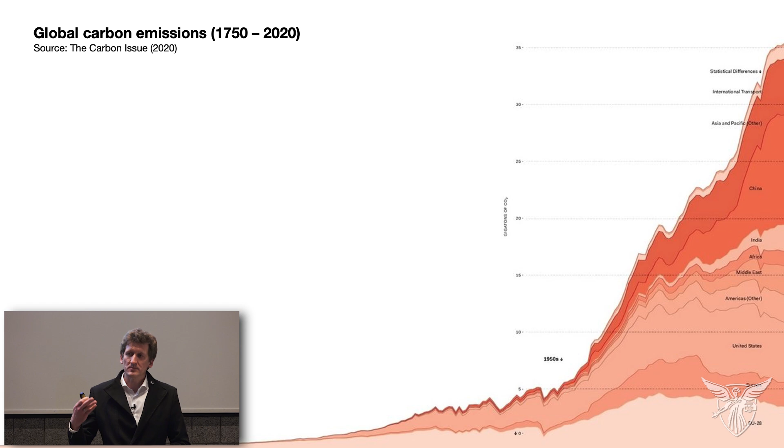And if you zoom a little bit more into some of these, this is the chart of global carbon emissions over the last couple hundred years. And you notice this exponential growth that started with the industrialization and then continued development. But the reason why I'm showing it is because to stay within, for example, the Paris agreement goals, we would need to mirror this chart and drastically reduce emissions very, very quickly to reduce global warming.

Essentially, these are estimates by Architecture 2030, and we're talking by 2030 we need a 65% reduction in emissions, which we all know in our industry, 5 years is basically tomorrow. That's the design phase and construction phase of one building. And so we need to act really, really quickly.

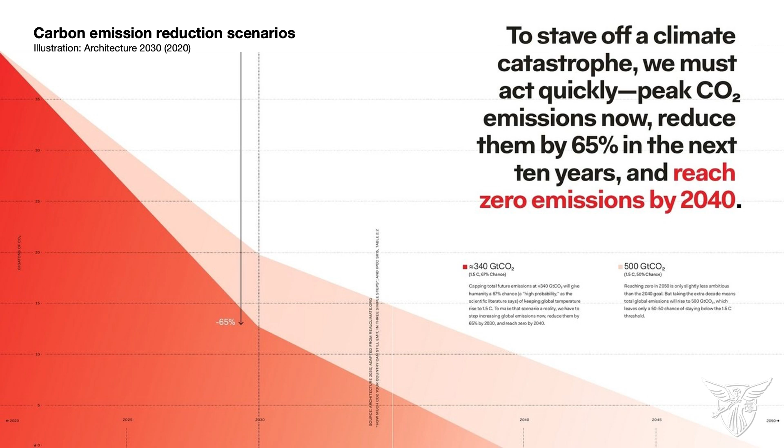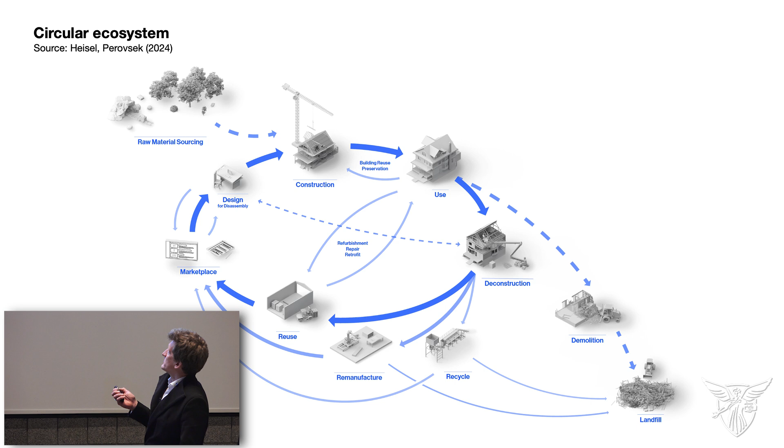And so what the lab is essentially trying to do is close that loop. And by closing that loop, we reduce the emissions that come from raw material sourcing, and not just the emissions, but also the social impacts, the environmental impacts, the labor impacts that are associated with global material sourcing. And at the same time, on this end, we're reducing the amount of waste that's going to landfill by closing that loop.

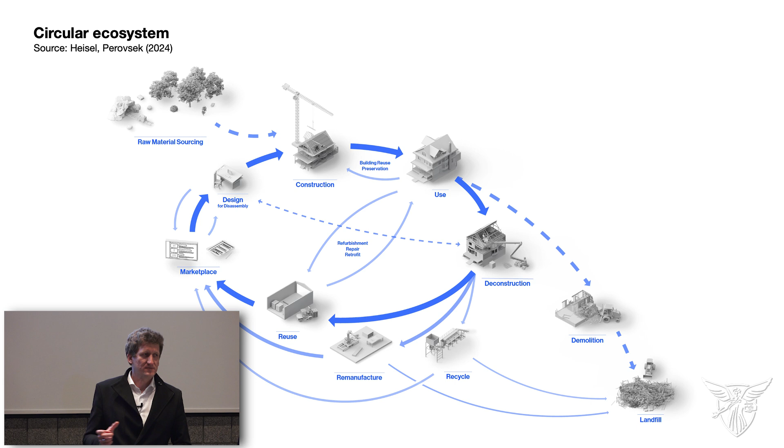And the important thing is that there are several different strategies within a circular economy that we can look at. There's, of course, recycling that we've all talked about for years. And then there's remanufacturing and reuse and several others. By now, I think we are at 7 Rs in some of the publications. But what I'm trying to show here is that the most impactful of these cycles is the smallest and the most local, and that is direct reuse.

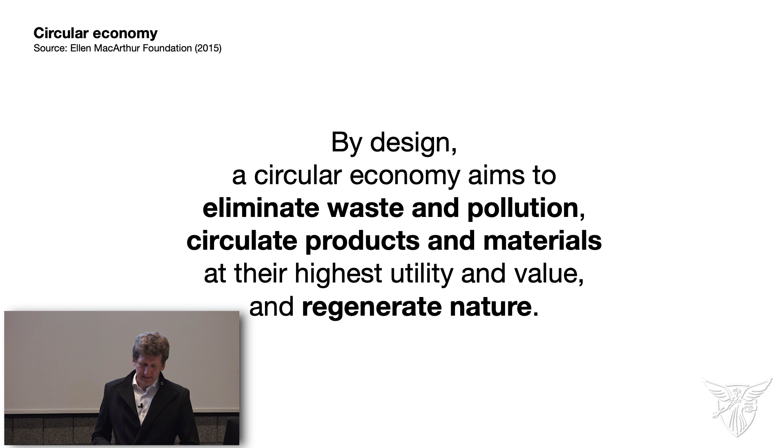And just so that we all have the same definition in mind, if you try to define a circular economy, then it is by design a system that eliminates waste and pollution, circulates products and materials, and regenerates nature. And I'll try and cover all 3 of these main points tonight. So this all sounds fantastic. The problem is the reality looks more like this.

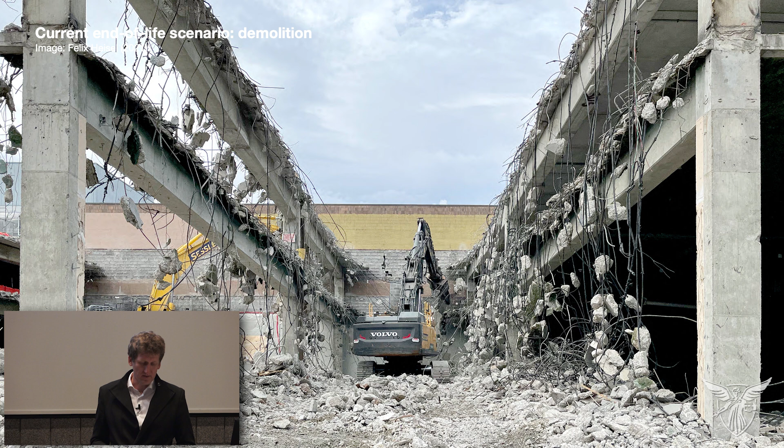So if we look at the end of life of a building, we are demolishing. This is an example from Ithaca, New York, where the construction manager was actually incredibly proud of what they've done. Right? They pulled out all the steel, they ground down all the concrete, they reduced landfill. But then when you start digging into these material streams, the steel was exported to China for recycling. So just the distance and the emissions associated with that travel probably offset any of the good parts that the recycling will do.

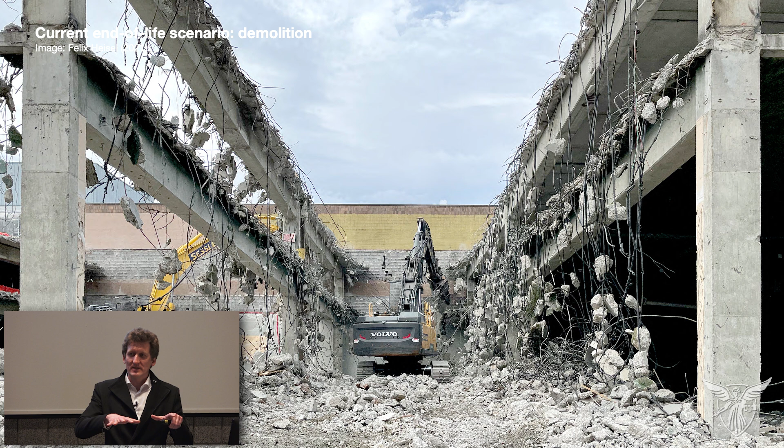And on the other side, the concrete aggregate was used as clean fill on the local landfill. So this is just renaming what is actually happening, right? We need to weigh down our landfills, and instead of using virgin rocks, we use concrete, but essentially we're putting the concrete on the landfill and calling it circular economy. And that explains a little bit the struggles that we're facing in this industry, right?

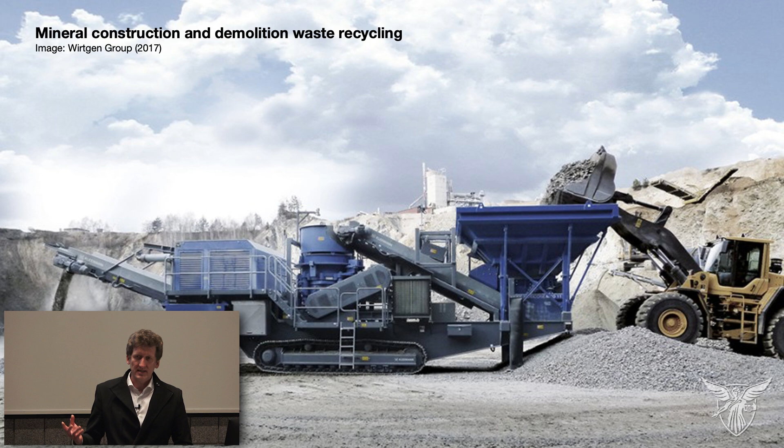So if you go through the material cycles quickly, we can of course recycle mineral demolition waste. We use it for roads, for aggregates. The problem with that is that the cement is actually the real problem and the aggregate isn't. And so we're not really tackling any of the environmental impacts of concrete, but we're of course at least reducing the waste. But then there are other families like glass that are technically 100% recyclable, and we're just doing a really bad job in getting the material out of the built environment in a way that is reusable or recyclable.

Just for information, if you wanted to use recycled glass cullet to produce float glass, the technical limit is 1 gram of dust in a ton of material. That's the level of cleanness that you need to make float glass, right? If you look at our demolition sites, there's a little bit more than 1 gram of dust involved per ton of material. And so it's not about the technicalities, it is about the way we operate these sites.

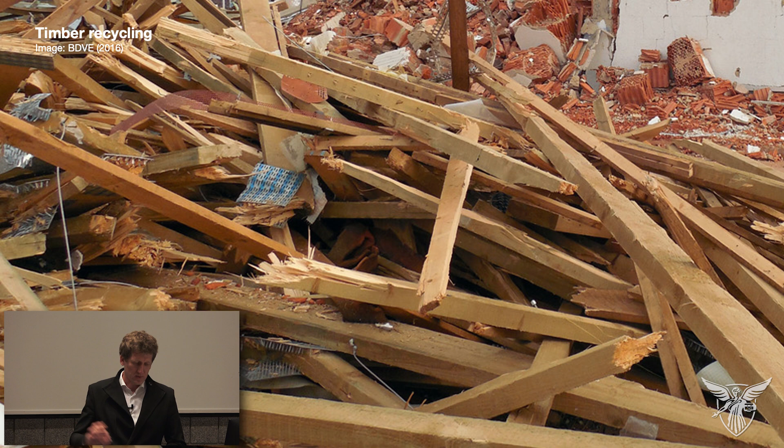And a similar example, you can look at timber, right? Timber theoretically can be reused very well, and I'll show some examples, but the way we break down our materials in the process, we're reducing the material value to 0 because we're breaking those pieces into small particles. And so that brings me to the first project that I wanted to show you. In the lab, we just simply said, okay, what would be an alternative?

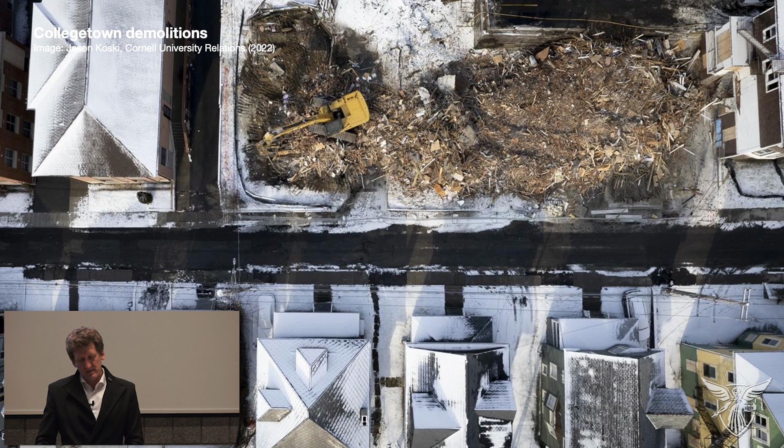An alternative to demolition is deconstruction. Deconstruction is not an alternative to building reuse or adaptive reuse or building preservation. I just want to make that really clear. We're not promoting the disappearing of buildings. We're simply saying if a building reaches the end of life and there's no alternative than clearing the site, then deconstruction is your sustainable alternative to demolition.

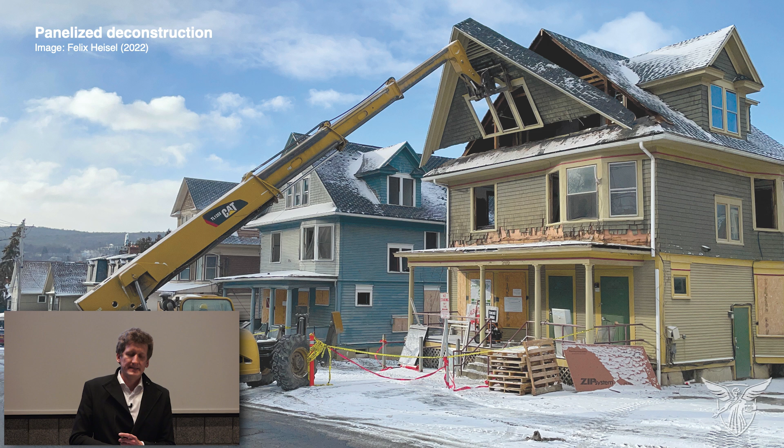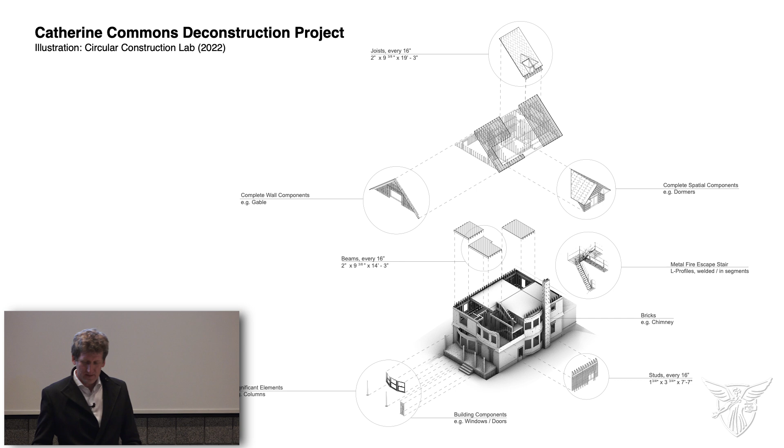And so one of the questions that we wanted to answer is how can we overcome the stigma that deconstruction is more expensive and more labor intensive than demolition and thus cannot happen at scale. And so this is a project in Ithaca where we convinced the developer of a large 300-bedroom housing unit to deconstruct one of the houses that he needed to clear in this site. So you can see he demolished 10 buildings while we got one to deconstruct as a case study. But the deal was we need to be as quick as his demo crew, because if they catch up on us, they will just demolish it.

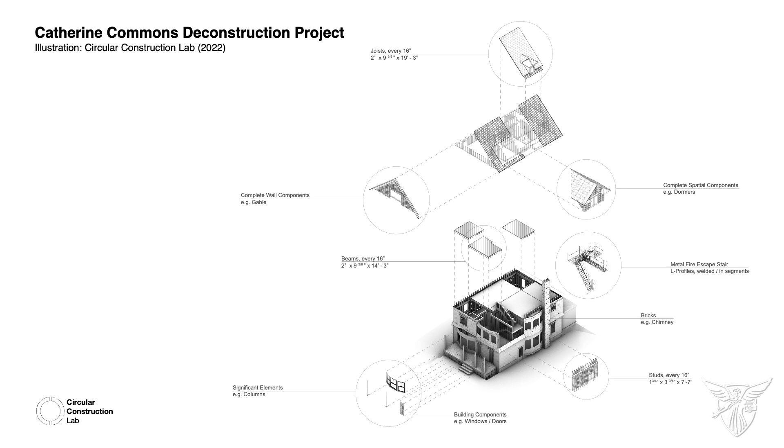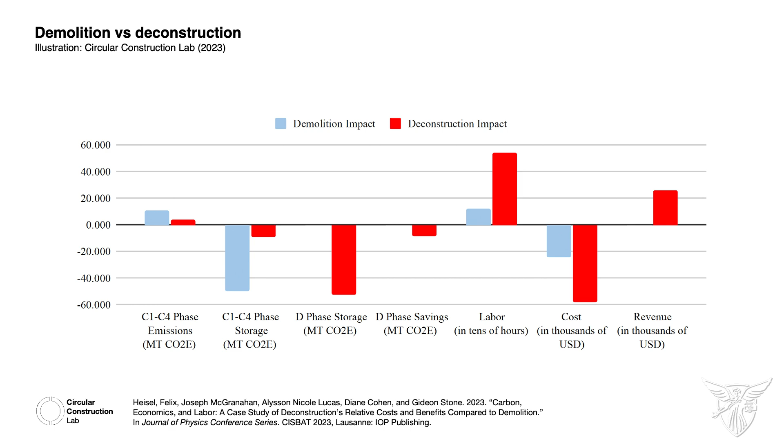And then we went at it and analyzed the data and worked on publications, and worked through the material and started reselling that material. And in the end, it turned out that the difference in cost that we had in the operation of the site, we were able to offset that with the revenue that came from the resale of the materials. And so now you're cost competitive and you're time competitive, right? And that's the good news, because now we can talk about the things we really want to talk about with deconstruction. It's the social values, it's the reduced air pollution, it's the workforce development that happens, it's the local job generation that happens.

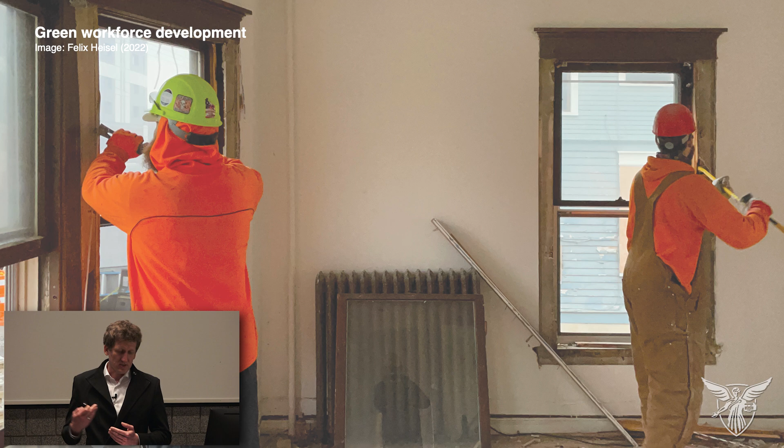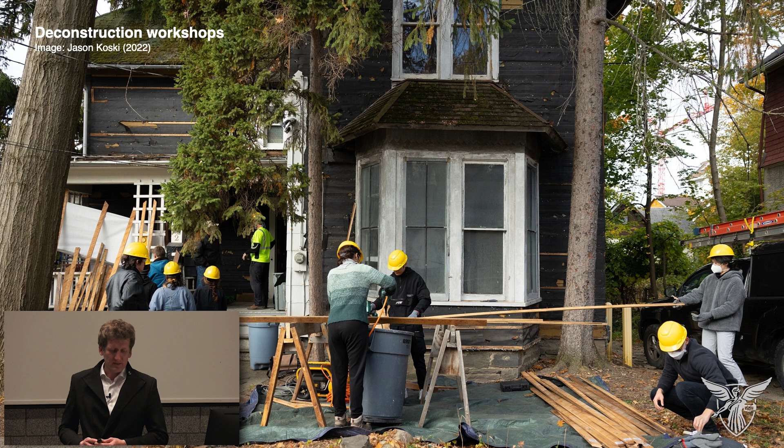So these are images from the deconstruction site where we trained local carpenters in the strategies of deconstruction. We, in this project, only employed union labor, so this is the local union apprenticeship program that was training on this deconstruction project. And then we started doing deconstruction workshops for students on different projects, learning from these experiences.

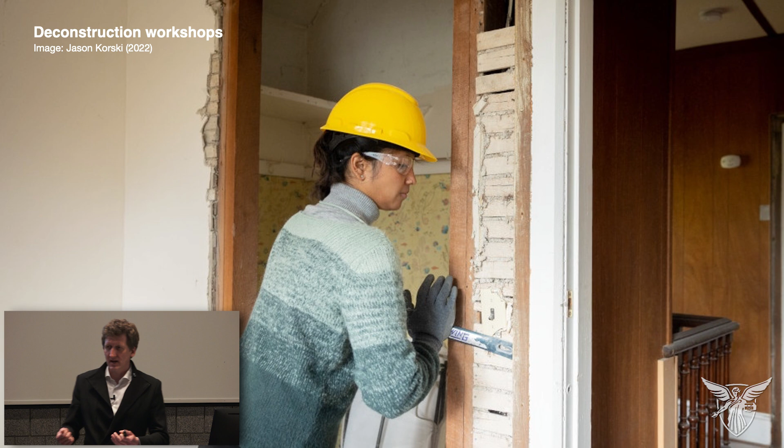And this is, of course, a fun experience, but there's also a pedagogic value in this, because if you've struggled for a couple hours to try and get a piece out of a building, and that piece wasn't meant to be taken out, right? It was glued in there, lots of spray foam, and I don't know what you want to do, right? And then you go back to the drawing table, you draw a different detail, right? You don't draw spray foam, right? Because you've just struggled with it.

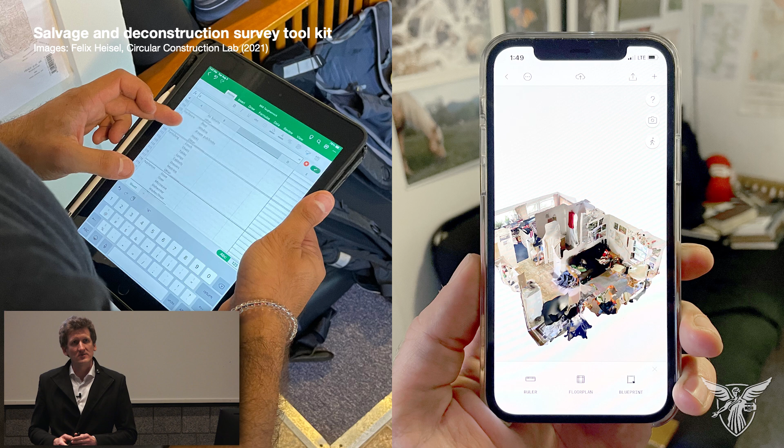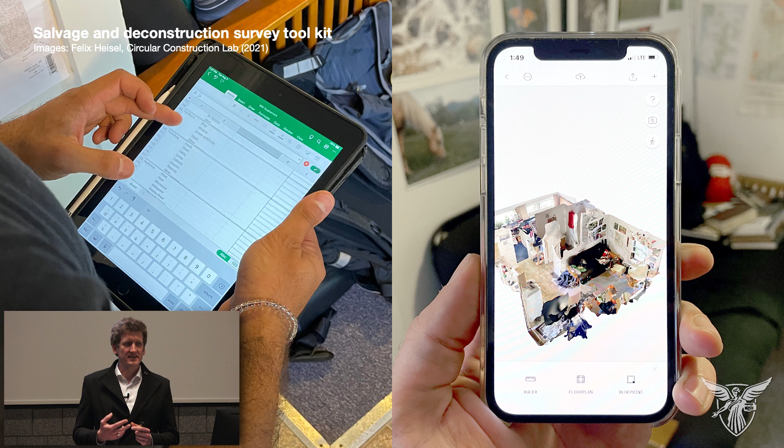There's a couple other things that this building taught us, and those have to do with what are the limits to scaling deconstruction. And so one aspect is that we tend to not know what we're going to find in a building. Documentation is missing. If we have any documentation, it's a nice hand drawing in the archives of the city, where you essentially have a thick black line that represents this is the wall section, right? But you would never know what are the layers, what are the actual materials in this building.

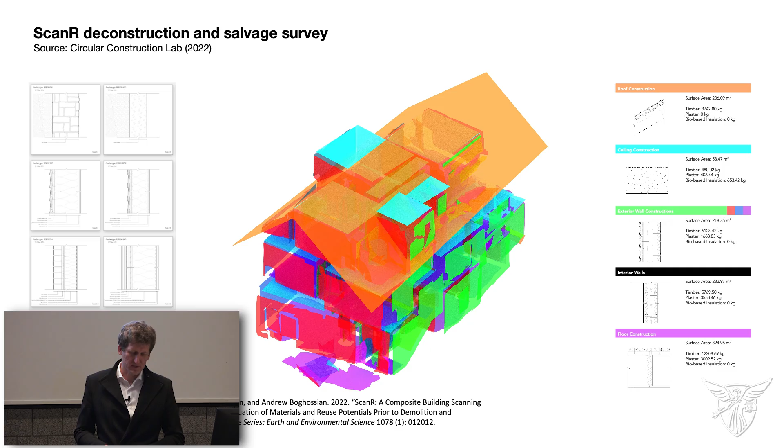And so we started to think about what can we do with technical means to make this process a bit easier, and developed an app which we call ScanR, which essentially combines a tool that now most of our contractors have in their pockets.

Tablets or iPhones all are LiDAR scanners by now, and so can we use these really low resolution LiDAR scanners that are available to almost anyone now, in combination with a database of construction archetypes, to very quickly estimate what is the content of a building, what are the tonnages that we're expecting to come out of a building, what is the embodied carbon values that are associated with these materials.

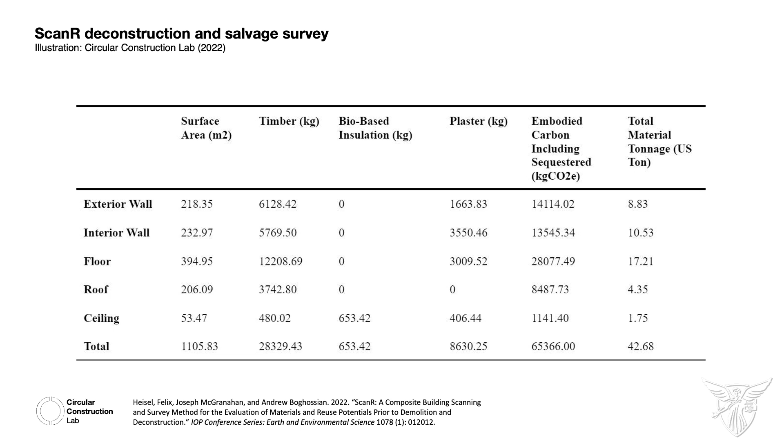And we're not saying that this is bulletproof and this data is all correct. What we're saying is it gives a contractor really quickly more information for an informed conversation about deconstruction or demolition. Right? So it's just a way into a conversation that we want to have and that we tend to not have because of the limited data availability. And so you can have a conversation with your building owner or your architect or your deconstructor or your permitting officer about the benefits of deconstruction.

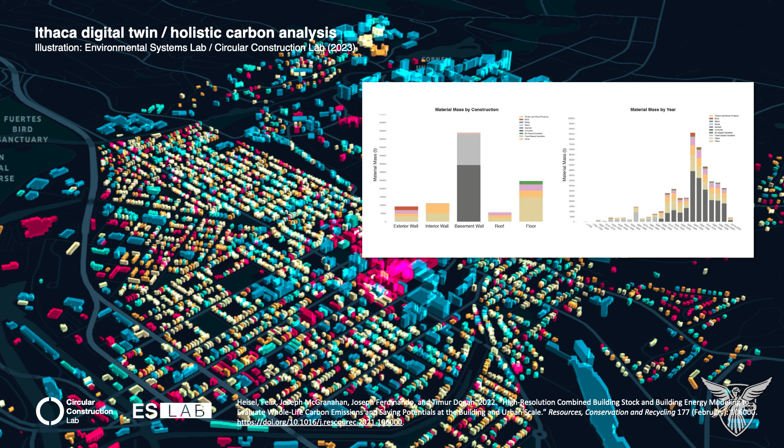Now, the interesting thing is, once you can do that on a building level, you might think about the city level, the urban level. And so we started a project together with the Environmental Systems Lab at Cornell University to build a digital twin of Ithaca. Ithaca is an interesting case study because it has one of the most progressive environmental laws in the nation. The agenda is to decarbonize all 6,000 structures in Ithaca by 2030. That is also tomorrow, and I'm not sure if we're going to get there. But it is an incredibly ambitious goal that drives a lot of research and movement.

And so we're helping the city, and the city is helping us to figure out what are the right questions to ask, what are scenarios that are important to model. And so we're using similar techniques to understand what is the material content of a city, what is the makeup of these structures, what are possibilities in terms of the use or the continued reuse of these buildings, and what are scenarios when you start upgrading in terms of the materials that you take out and the materials you have to put back in, right, in the renovation process, and how could we close the loop on those.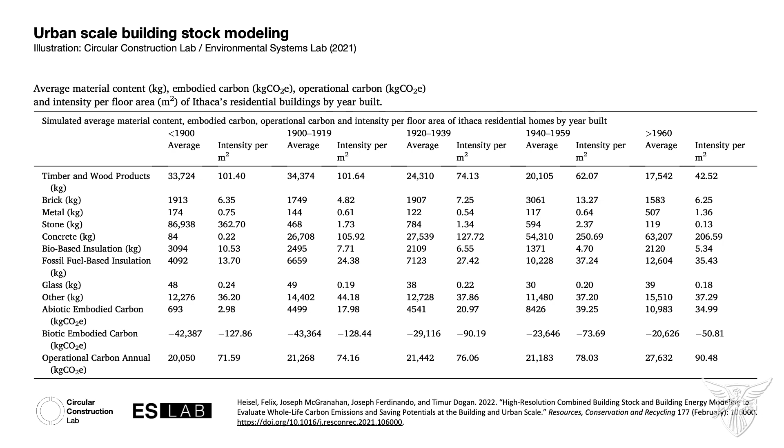And then the last question that we can answer at this level is, it's not just about how much timber is in a building or how much concrete is in a city, but which part of that is accessible, which part actually has value, and so we can start calculating circularity indicators for buildings, for material groups, or for components on the city scale.

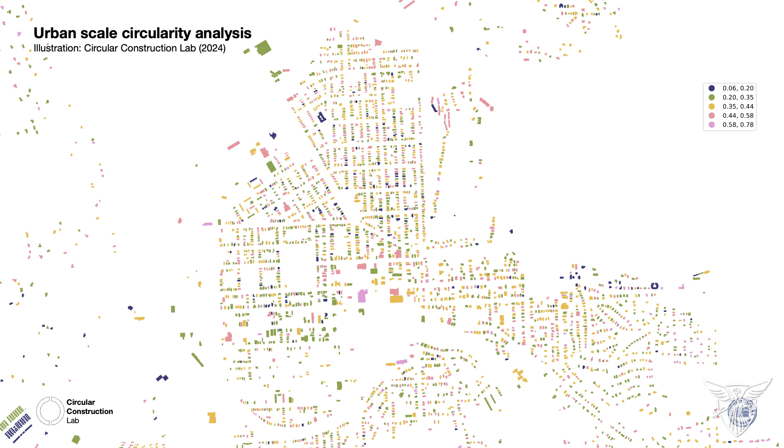Now, as I mentioned earlier, none of this is possible to do alone, and it's become more and more obvious that we need policy and code to follow suit, or to support us, or to create a framework that we can operate in. And so we founded in 2020 an advocacy group that we called CROWD. CROWD is an acronym that stands for Circularity, Reuse, and Zero Waste Development.

It's a group that came together out of the concerns about demolition in Ithaca, but then very quickly grew to a statewide organization that now has several cities and municipalities in it, but also for example, the New York State Preservation Association, a lot of research labs, reuse centers, industry, NGOs. And so we started meeting during COVID every Monday morning at 9, and we're still now meeting every Monday morning at 9. And that is an incredible tool to move agendas or understand where we should act, because all of these different agencies have their feelers in the conversation and can report back.

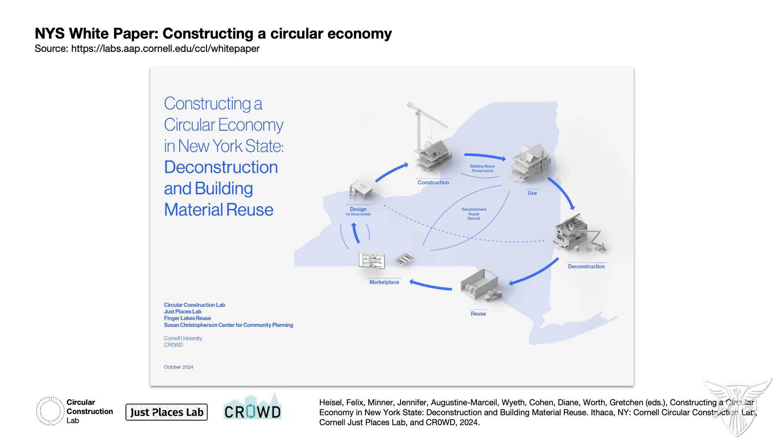And so as a group, we, a couple of years ago, realized we need to put out a white paper that estimates the potential of this on a state level to convince people that we need to change policy and legislation. And so we just published a white paper. It's titled Constructing a Circular Economy in New York State. It's freely available. And the goal really was to, first of all, understand the status quo. Where are we? What is the data? How much waste are we generating, et cetera.

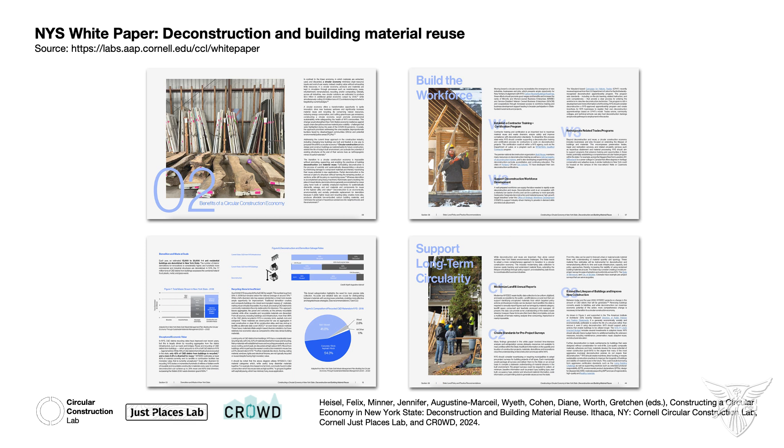And then going from there, do economic analysis of what is the potential, and our estimates are that if we were to shift about 75% of residential demolitions to deconstruction statewide, there's a $3 billion economic impact of that, and about 13,000 jobs that could be created. And so suddenly we're realizing, hey, that there's something there that actually might make people aware of a possible shift.

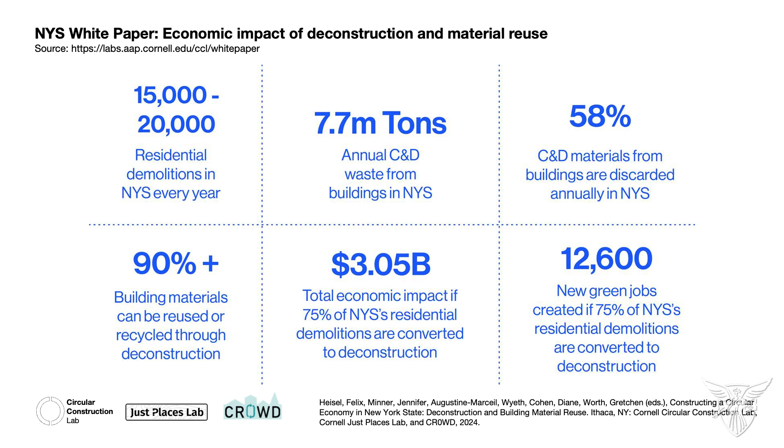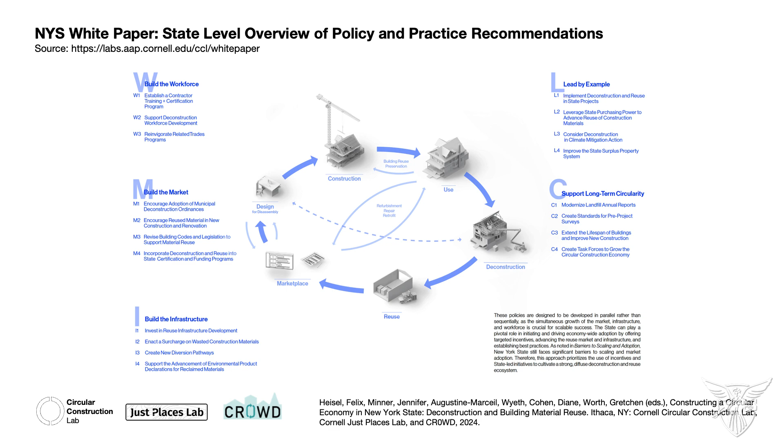And then we followed up with 19 policy recommendations on how this shift would be possible. And these policy recommendations essentially follow all the life cycle moments of a building. So how do we build a workforce that does that? How can we build a market for those materials, right? Because if you just take a lot of materials out of a building and they don't have anywhere to go, then that doesn't scale either. How do we build the infrastructure, right, to do all of that?

How can the state lead by example? It's interesting, in New York State, for example, the university system owns about 40% of real estate statewide. So if they change, right, there's an enormous budget, an enormous capacity of buildings to lead by example. And then questions of how can we sustain that circularity moving forward.

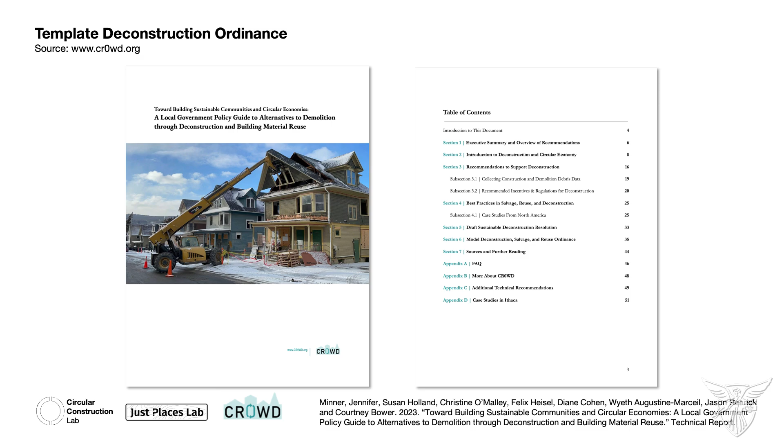Part of this is also the recommendation for a deconstruction ordinance. We developed a template deconstruction ordinance that now has been used already in 2 municipalities, Auburn and Dryden, throughout the last year, to be passed by the city and town councils unanimously in both cases, to shift really from demolition to deconstruction.

Now I mentioned I'm going to talk about the 3 parts, right? So now we've created a lot of material. The question is, what do we do with that, right? And so I wanted to show a couple projects. This is a project from our office in Germany. It's called the Mehrwert Pavillon. It's a pavilion that we built for the Ministry of Environment in Baden-Württemberg for the Federal Garden Show, which is a massive event that happens every 4 years in Germany.

And they asked us to build a pavilion only out of secondary resources. So all of the materials in this pavilion are either recycled or reused. There's no virgin materials. And so we decided to kind of split it by material families. The shell is made out of recycled glass. The structure is made out of directly reused steel. Then all the furniture is recycled plastics, in this case recycled household plastic waste. And then we have all the ground and the foundations out of reused or recycled mineral waste.

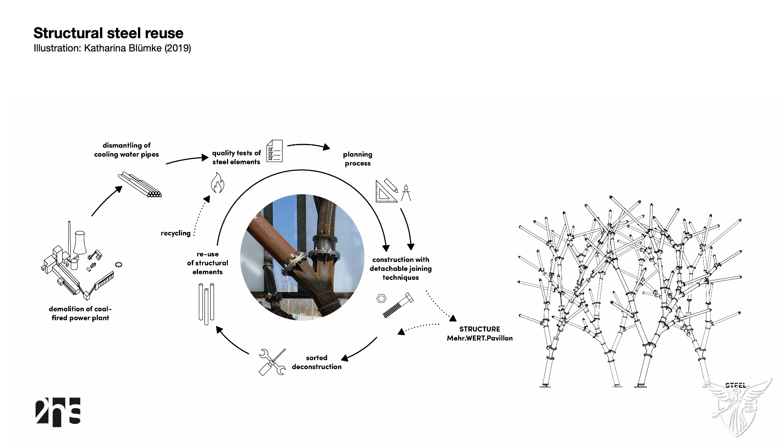And so we had an interesting source because all the steel that came out of this project comes from a former coal-fired power plant. Germany's shutting down its coal-fired power plants because of the shift to renewable energy sources. And now we have these structures standing in the landscape and no one knows what to do with it. It's massive infrastructure that is now obsolete.

Unfortunately, the standard answer is we're going to demolish this, and they did. But before they did, we were able to pull out enough steel to build a small pavilion. The problem was we had no idea what kind of steel that is, right? There was no documentation, and so without documentation, no building permit, right?

And so we ended up having to do 5 tests, most of it like chemical composition, weldability, tensile tests, compression tests, to specify the material qualities of the steel to in the end find out this is standard structural construction steel. And the moment we had that answer and we had it signed and on paper, we got a building permit to build with it, right?

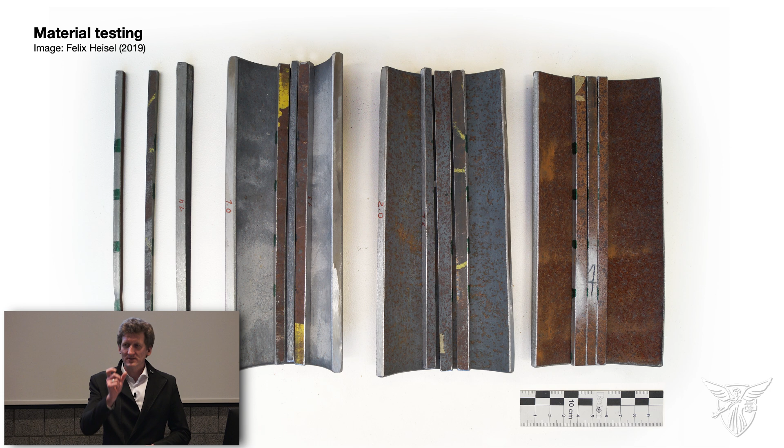So the point here being there is nothing in the code that specifies virgin or primary. There's no difference from a code perspective. The only thing you have to fulfill is you need to create enough information to specify that you're fulfilling the criteria that the code specifies, right?

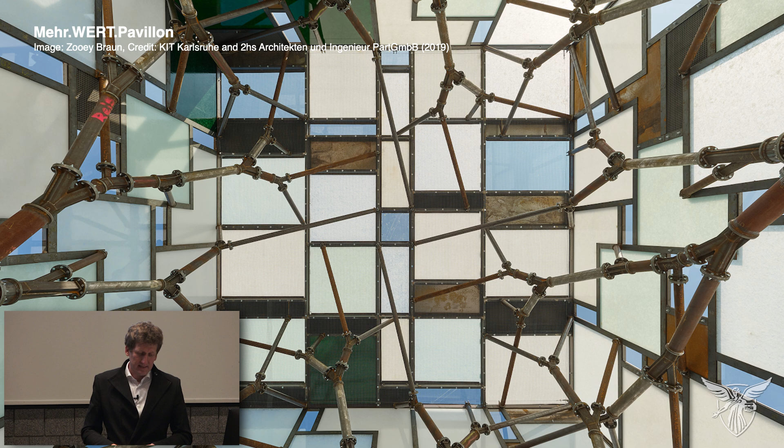And so in this case, we then were able to build this structure out of these tubes that held this pavilion. A side note is that, of course, this pavilion would have never looked the way it does without a very specific material stock to work from, right? And so the design process with reclaimed materials is a very different one from a normal traditional design process where we first come up with a form and then we open the catalog and we pick the materials that will fulfill that form, right? In this case, it's the flip side.

You first have a material and you need to figure out how do you design with that, what kind of forms could you build with it. And it's a really interesting exercise and one that I hope will become the norm moving forward.

Similar project, but in a very different context. This is a small pavilion that we did at Cornell University. Here we reused part of the materials that we salvaged from the deconstruction project I just showed you a couple minutes ago. And this is a little pavilion for an arts biennial at Cornell University. It looks very small, but it is large enough to require a full building permit by the city of Ithaca.

And that actually turned out, in the end, as much work as it was, as something really positive, because it required us to think through the process of what does it take to get a building permit for structural reuse of salvaged timber, which is by code not allowed in New York State. And so working through that essentially opened up 3 new research projects that we're still working on moving forward.

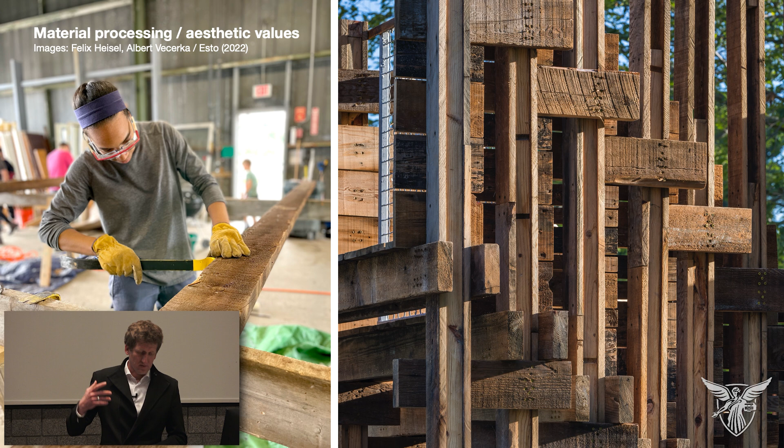It, of course, started with the process of how do we use these materials, how do we process these materials. We took out all the nails, there's lots of hand labor in this, questions of the aesthetic of cutting through it, the old patina, the new cut. There's a lot of aesthetic questions that we thought about in how to use this material.

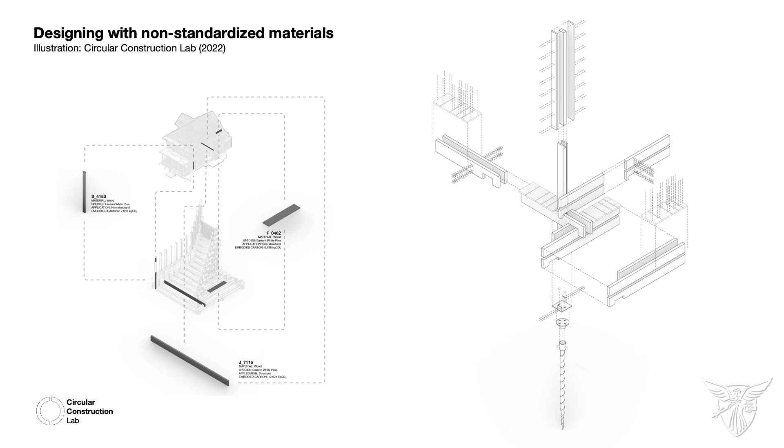Then again, there's a data-driven question that arose from it, kind of where did the material come from, and where is it now, and where is it going next, and how do we create a material passport for these materials, and how do we connect the digital and the physical, which is a really difficult question, as it turns out, to continuously link a digital twin to its physical representation when you start messing with the physical, right? And the items go different places.

Or how do you design with a stock that is not uniform? Material tolerances, for example, were up to about 1/2 inch. And so if you design a detail that depends on the fact that you need this tolerance to be near 0, none of this fits together in the end. And so how do we change our detailing so that it adjusts to this new type of stock that we're creating through deconstruction?

At the end of the life of the structure, we had to take it down. Of course, it was on university grounds. The space was needed for something else. But we were invited to rebuild it as part of the permanent collection of Art Omi, which is a sculpture and architecture park near Albany.

And of course, the site was different, and so our answer needed to be different. And so we were able to reconfigure the structure because it was designed for disassembly. All the details were possible to be readjusted. And so this is how it now looks currently in this sculpture park.

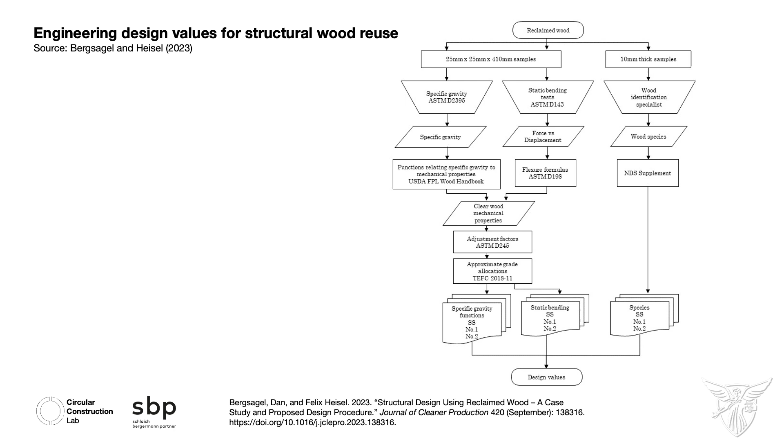I mentioned that there's research that came out of this. So the first question that we tried to answer: what are the correct engineering design values when you work with structural wood? It turns out that the standard process would be you go into your book of specifications, you look up the design values based on your species, and then you use those design values to calculate the dimensions that are required for the specific load. Right? The problem is we don't know what the species is, right?

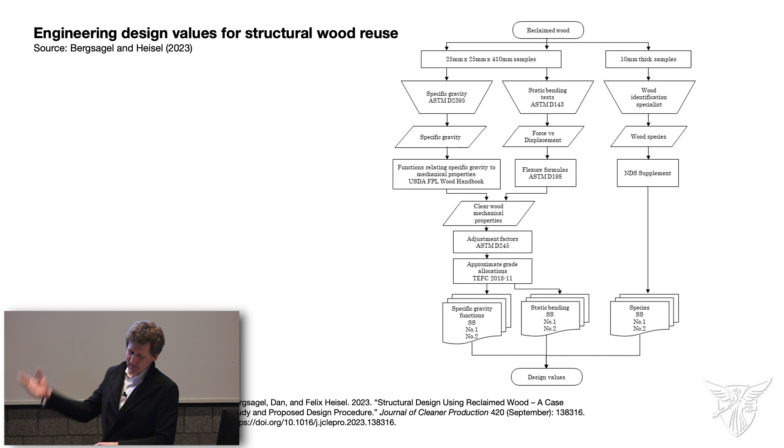And we sent out samples to 3 national experts, and we got 3 different results. Right? And so that sort of said, okay, this doesn't scale. How can we move forward with that? And so here's 3 different other paths of how this could work. We could, of course, do structural testing, but then we lose a certain amount because that's destructive testing in most cases. We can go by the specific gravity, or basically the density of the material.

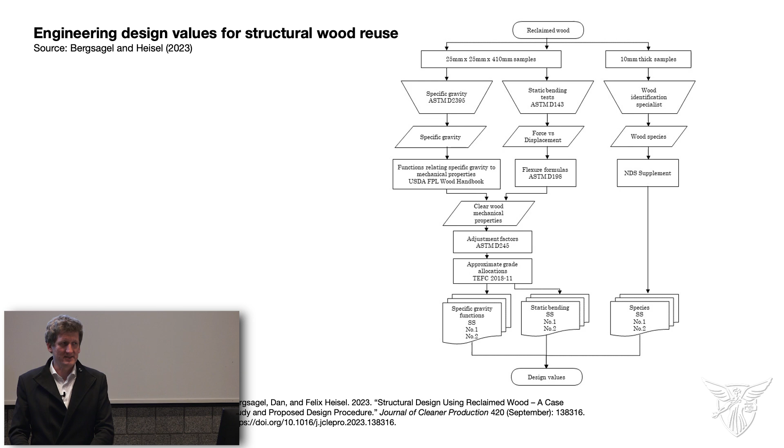We can do a sort of midway with some testing and some assessment. But it turns out actually all of it revolves around the density. So the quality of the material actually makes the biggest impact, and that's good news. The density is something that everyone can easily test. All you need is a scale and a tape measure. So that's interesting. But out of that conversation, again, came the question: how can we implement something at a larger scale, maybe?

And we learned that there's two states that have legislation that allows timber reuse. Not surprisingly, that's Washington and Oregon, because they have phenomenal old growth timber in their built environment. And if you deconstruct a house in Portland, Oregon, you get a value out of it that's probably much higher than anything you could buy right now in Lowe's or Home Depot, right?

And so they always understood the value of these timber elements, and now basically allow the direct reuse of these elements through code, because it auto-assigns a grade 2 to any timber that comes out of a deconstruction project. Which is a structural grade, and you can do stick frame construction with that. And so you can start building residential houses without having to reapply or regrade the timber.

This bill is doing something similar. It's learning from the precedent in these two states, and is in both the Senate and the House right now for discussion in New York State. But there's something maybe that machines can do for us in terms of visual grading. And so another project that one of my PhD students is working on right now is the question: can we use AI to do visual grading of lumber?

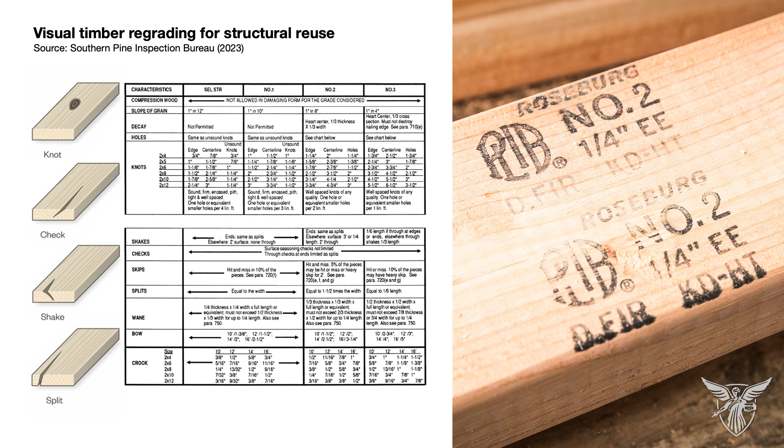Because in the end, it's a very technical and very prescribed process. You're counting knots, the size of the knots, the distance of the knots, the length of a crack or a check or a split. And if we find a way for the machine to understand and detect these defects, we could use the machine to do the grading for us, and it actually works phenomenally well. So we have a process now in place that does the visual grading and detects these things.

And the next step is to now integrate this into the inline process of Urban Machine. Urban Machine is one of our industry partners that developed a robot to denail lumber. So the robot pulls out the nails. And what we're hoping for is that essentially now at the end of this process, you don't just have denailed lumber, but you have denailed graded lumber.

Because at the end, as the last step, the machine puts the stamp on it because we know what quality it is. And the interesting thing, going back to the conversation about steel: that bypasses any new requirements for building codes, because the moment it has a grade, it goes directly into the market and can be used like any other timber.

And the last step in this is, what can we do with all the smaller pieces, right? Because what I just showed you assumes that we're pulling out nice joists, 2x10s, and beautiful material. That's not always the case, right? Sometimes you end up with a small piece and you don't really know what to do with it. And the answer to that, of course, is engineered timber products. That's essentially what the industry does already.

The problem with those, from a circular construction perspective, is the adhesive, right? It's full of adhesive, potentially VOCs, undetermined end-of-life strategies. And so what we're trying right now is something we call GrooveLam, which is essentially using a mechanical interface between the layers and fasteners. In this example, it's plastic straps. They turned out not to be the best solution, but they're the most visual on what it does. It just holds together these two pieces, right?

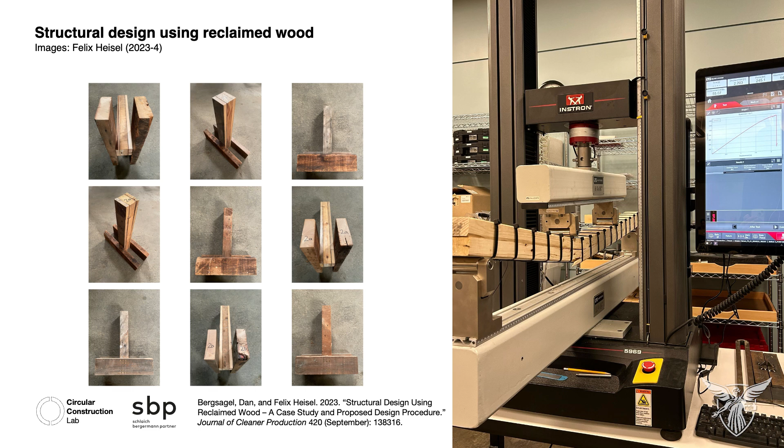But we're creating some really interesting large-scale beams that are engineered timber products from shorter length and shorter dimensions, but that can span large dimensions. And we just won a grant, NYSERDA grant, with a really phenomenal collection of industry partners to scale this process, and we're working on the design for 2 case study projects, one in Brooklyn and one in upstate New York, to really reuse deconstructed lumber for larger spans.

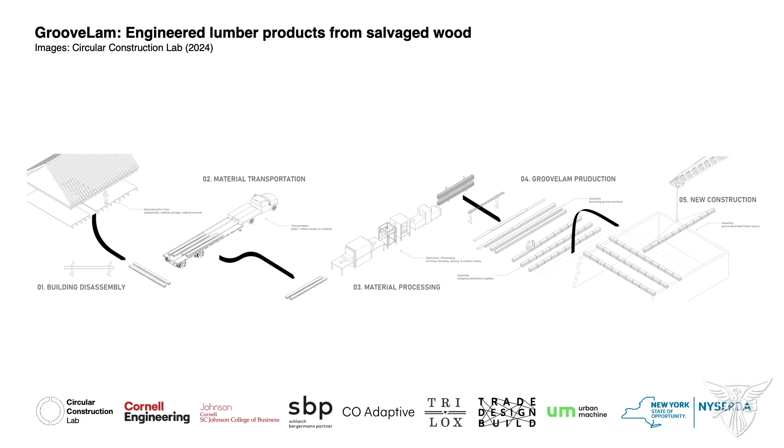And then there's the third question, right? If we're not just using salvaged materials, that's one part, but the question is, how do we design differently so that buildings in the future can be disassembled easier, right? So that we don't have to deal with all the problems that I just explained.

And so there's one case study that we built with the office again in Switzerland in a collaboration with the office of Werner Sobek. And it's called the Urban Mining and Recycling Unit. It's essentially this piece. The larger structure is called the Nest. It's a really interesting research infrastructure that EMPA, that's the former material testing agency of the Swiss government, built. It's now part of ETH Zurich and became sort of a material research testing laboratory. And they built this structure that allows for one-to-one, full-scale modules to be pushed in to test different ideas.

And so they came to us and said, well, you published this book, Building from Waste, and does that actually work? And could you prove it? And can you build a building that is designed for disassembly? And so the brief was very clear. Any material that goes into this house has to be able to come out and go back into their original material cycles. No waste. It's a very academic brief for a full-scale actual construction. And so we tried to push it as hard as possible, and we had the phenomenal position that our client supported this research and had the money to fund some of these more extreme solutions.

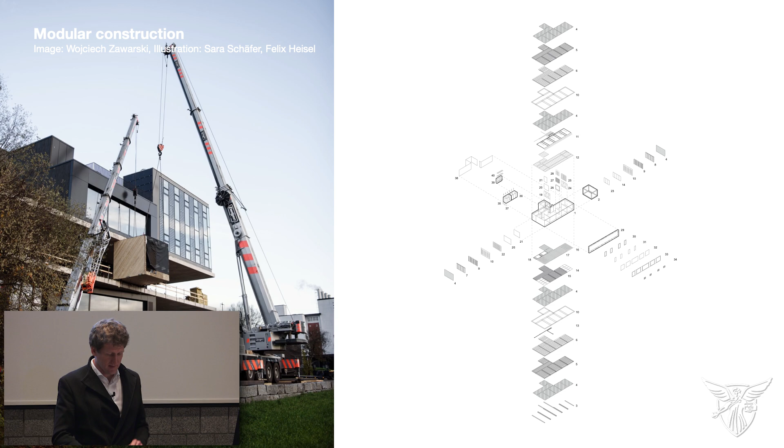But the benefit of the assembly plan of the module is that it is also the disassembly plan. Right? So you already know which materials are where, how are they connected, and so that involved this kind of design for disassembly idea. And then we were wondering to answer certain questions. For example, can we build brick walls without mortar, right? And so there's an answer to this.

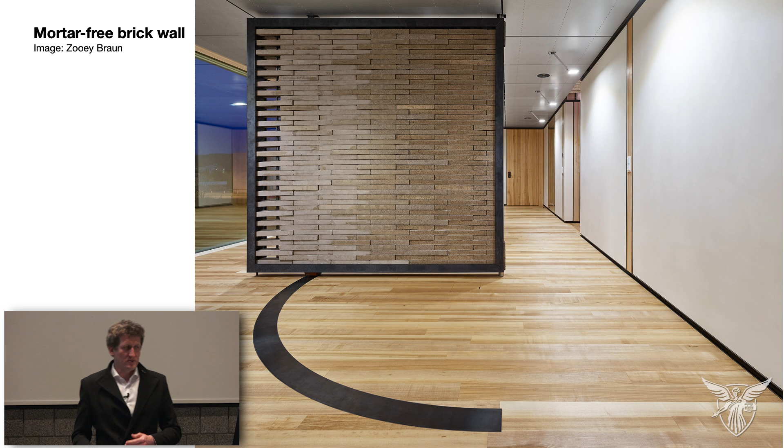This uses bricks that are made out of construction waste. It's a company called StoneCycling from the Netherlands that is selling bricks that are called wasabi or aubergine or salami based on which particles of demolition waste they're putting in. So the bricks are sort of the salami pieces, and it's a beautiful product. But we worked with them to develop a unique brick that has a tongue and groove system and holes for post-tensioning bars. And so there's a structural wall that is made entirely from a mortar-free brick construction.

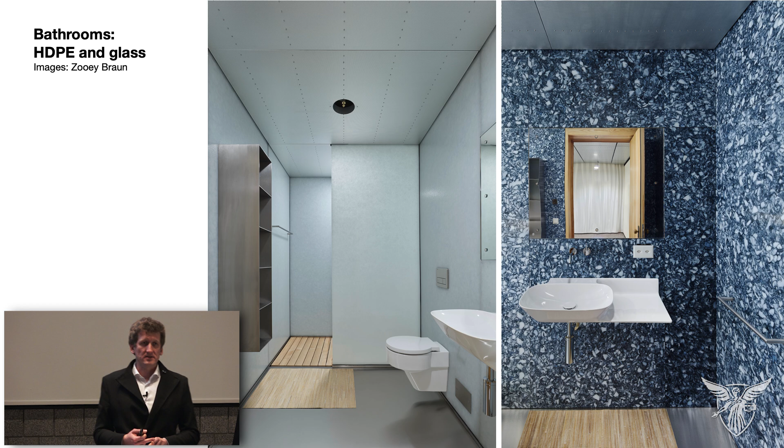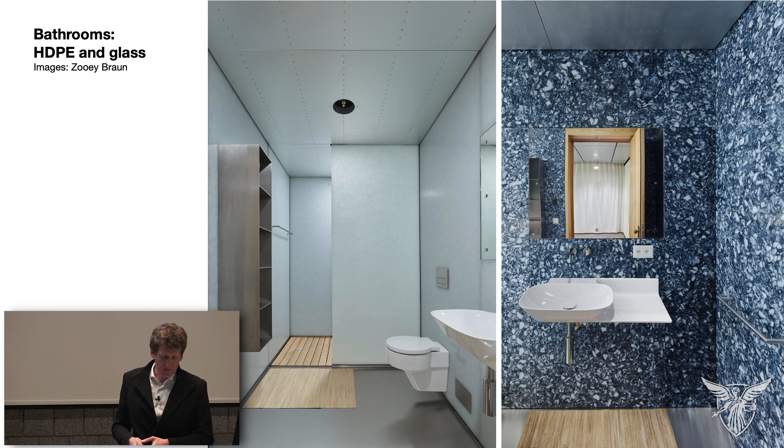What I mentioned earlier, the really tricky part was, can we do wet areas, bathrooms, kitchens, without silicone, without mortar? And so all of the connections in these rooms are dry gasket sealant. It's just pressure with 2 screws at the top, and the largest possible formats to reduce the amount of connections that we had. And so this brought us back to glass ceramic, the material from the pavilion, but then also an alternative. These are former kitchen cutting boards that are turned into this beautiful sort of fake high density polyethylene marble interior wall.

But it went further. The question was then, okay, what are the faucets? What's the equipment? And we did not find a single faucet on the Swiss market that fulfilled the requirements of design for disassembly. Faucets are usually elements that are press-fit together out of at least 3 different materials. Like you have a copper pipe in the middle, some kind of casing around it, you have plastic pieces for the movable elements. None of this can ever be separated again, and so the faucet ends up on the landfill because you can't do anything with it.

And so we worked together with Arwa, which is a part of Laufen, one of the larger Swiss companies for bathroom equipment, to 3D print out of stainless steel. So these are monomaterial faucets where all the moving parts, everything is printed in one go out of one material. And so, of course, the idea here again is we can use this as long as possible. We can polish this. This is a high-quality product. At least it should last for years. But if it ever ends this life, we can reprint something else out of it because it's exactly the same feedstock for the same printer as it was in its first production.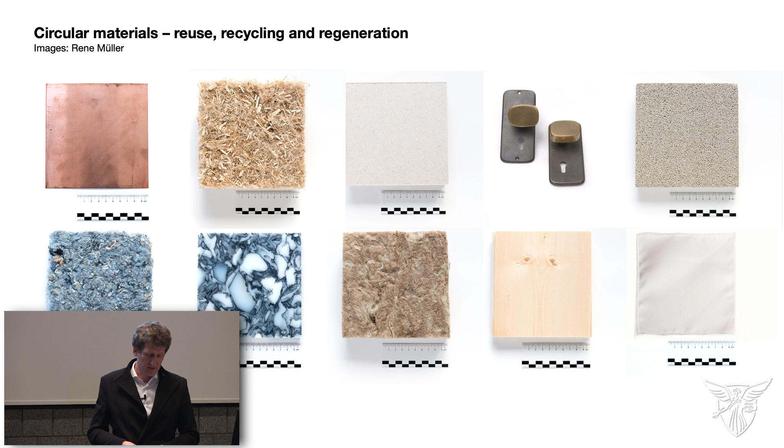There's just a couple of ideas. There's 24 materials in the unit. They're all really well documented. It has its own website. We have also a physical material library in the unit that shows a little bit more examples with data sheets, and then we started doing a digital representation of that. This is called a material passport or a building passport. This was pretty early in the conversation of material passporting. By now, this is actually a requirement for any new construction in several European countries. When we started this, it was an idea.

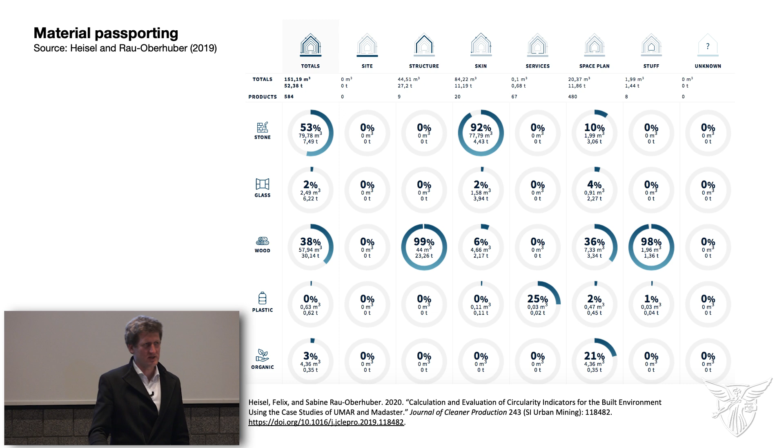And the interesting thing for us, and the reason why I'm showing it, is because it came way too late in the process, right? So we first built the design, and then we said, oh, let's make a digital representation of it and store the data so that at some point in the future, someone can access that data and decide how to best reuse the product. But what we noticed is that the circularity analysis that is embedded in this data set could have helped us make better design decisions if we had this data much earlier in the process. And there's no tool that allows that. At least at that time, there was no tool, and so we started doing our own.

This is Rhino Circular. Rhino Circular is maybe most helpful to the students. It's free for download on Food4Rhino. It's essentially a Rhino plugin that calculates the circularity of any design that you're feeding into it. And you can do that at a very early stage. You can essentially use it for a massing model where you just have a block and you assign 3-4 materials to the different sides, and you get a starting point of a conversation.

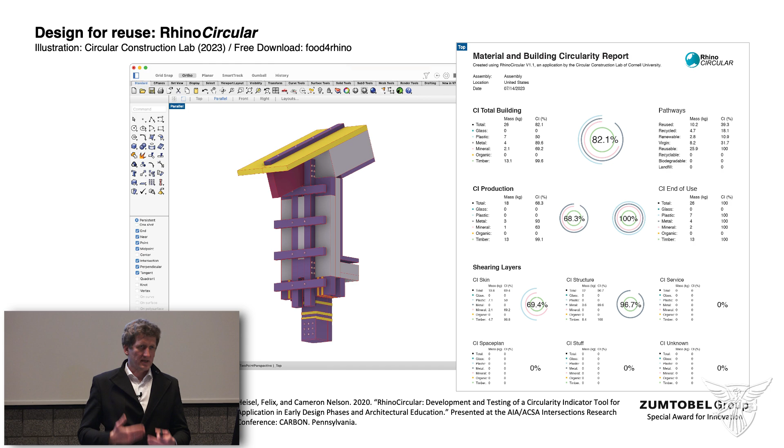But you can get to a very detailed analysis, and it can feed back circularity indicators in graphic representation to those details. So you can say, well, any of the materials that are problematic, they should light up in red or in green in your geometry. And so you have a very immediate feedback while you're modeling on circularity questions in your design.

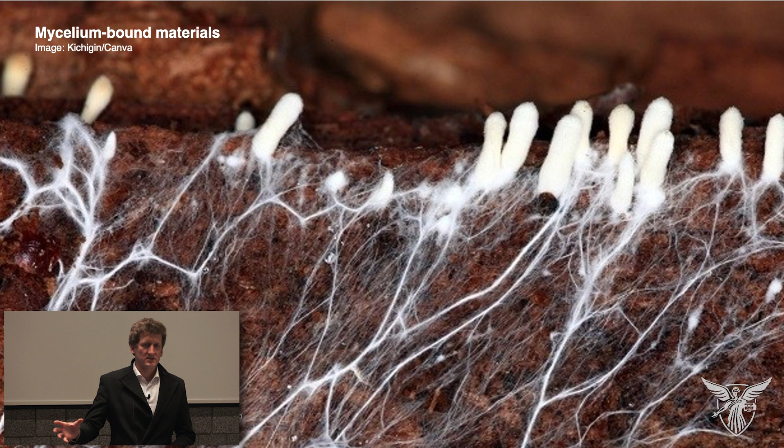And then, as a last project, because the lecture is called Deconstruction and Cultivation, I wanted to show you a project that is made out of mushroom mycelium. That's sort of the third part. How can we regenerate nature? How can we use, in those cases where we don't have salvaged materials, other types of materials out of nature as a resource? And the thought process behind that is we're never going to have enough materials from deconstruction to sustain the hunger of new construction. There's always more new construction than there is deconstruction, right? And so what do we do with that gap?

And that gap is timber, but it cannot only be timber because that's not sustainable either, right? To focus on a monomaterial actually got us where we are. The fact that the industry at some point shifted to concrete or reinforced concrete as the one and only material globally of how we build is one of the reasons why we have the problems we have right now. And so the more heterogeneous we are, the better.

And so when we talk about the possibilities of biomaterials, mushroom mycelium is one possible option. The way it is used is essentially the organism is a dense network of hyphae, which we're using as a biological glue to hold together substrate.

And we're not the only ones. There's a lot of mycelium research going on in the world because it's a fascinating material, and I think we've only touched a small percentage of what mushroom mycelium can do for us, or what mushrooms in general can do for us. I mean, several of you probably saw fantastic documentaries about the world of fungi. And so there are millions of different species out there, and they all have different qualities, and we don't yet know entirely what the potentials are.

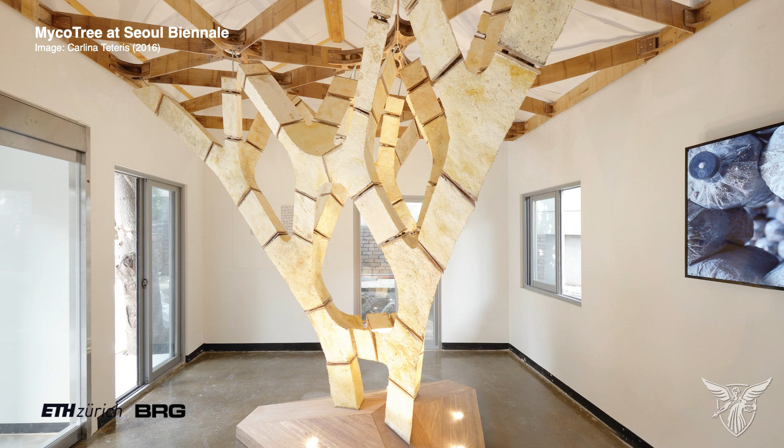But we've been at this for quite a few years now. 9 years ago, we opened this pavilion at the Seoul Biennale, which is called Myco-Tree, and essentially at that point in time said, well, mushroom mycelium is really good in compression, but it's really bad in bending. And so how can we find a form that is loaded in compression only? And we worked with Philippe Block and the Block Research Group to determine this structure, which is optimized for its load behavior so that there's no bending at any moment in this tree. It's a pure compression curve, essentially the inverse of a vault. And then we had this roof that sort of held it all together.

But since then, we've sort of continuously evolved this material. And so the next project that I'm showing you is again part of our Cornell research. And the question was, is there a way to make panels, load-bearing panels that do take some bending, and how can we build with those? And so we've done research for the last couple of years on this question, and I think we've gotten to some point in time where we can show these results. And we showed them as part, again, of a pavilion, as a kind of demonstrator.

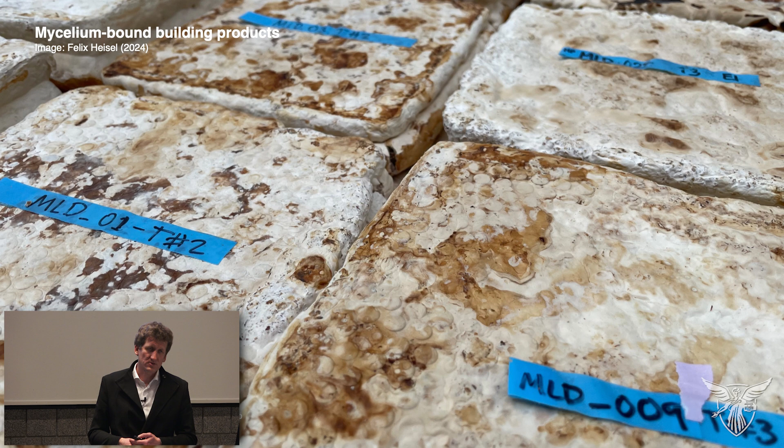So the question was, how can we build on this site something that is part of a pavilion structure, of a festival structure? Interestingly, the reason why this Buildfest has been restarted is that at the original Woodstock Festival, the structures that we all know, or some of us know from pictures, were built by students from the University of Florida. So already at that point in time, the idea was, let's bring students together to build demonstrators to sustain this festival with their structures. And so the revamp of Buildfest since the last 3 years is essentially doing the same thing.

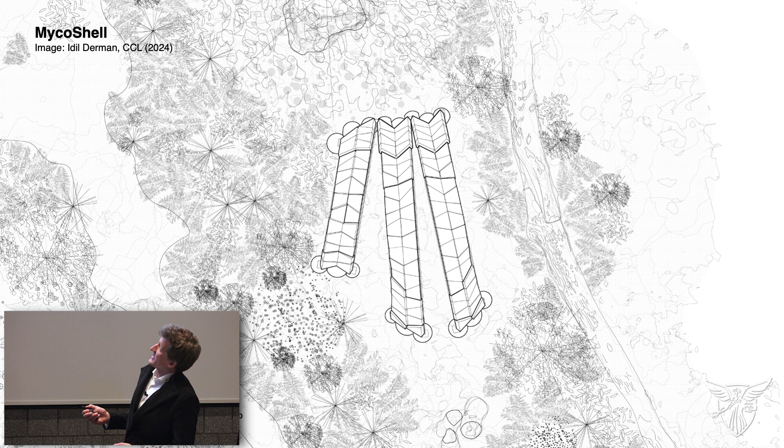So to get to the point here, we decided that we want to build a mycelium structure in this site that essentially sort of comes out of the forest using local resources, and then at the end of the festival goes back to the forest by biodegrading into the site, right? Because it doesn't use any foreign materials, it's all local, and so that's really sort of the biocycle as a building. And so again, we use sort of the vault as an idea to structure this. This is the site, and it's kind of split into 3 arches.

And then we started building this using our own fabrication labs. And for those of you that are not familiar with mushroom mycelium, it's a pretty long process because you're actually growing a material. And so you need weeks and weeks to do that. And it can be pretty frustrating because at some point the growth maybe of some of these doesn't work, or you have contamination. And so there is much to still learn on how to grow materials at this scale.

But the timeline essentially uses the inoculation in the petri dish, then the mixing of that substrate with that inoculation, you grow it in frames. You can bioweld mushroom mycelium, and I'll get to that. And then you basically get these long arches, and we can then set them up on site during the festival.

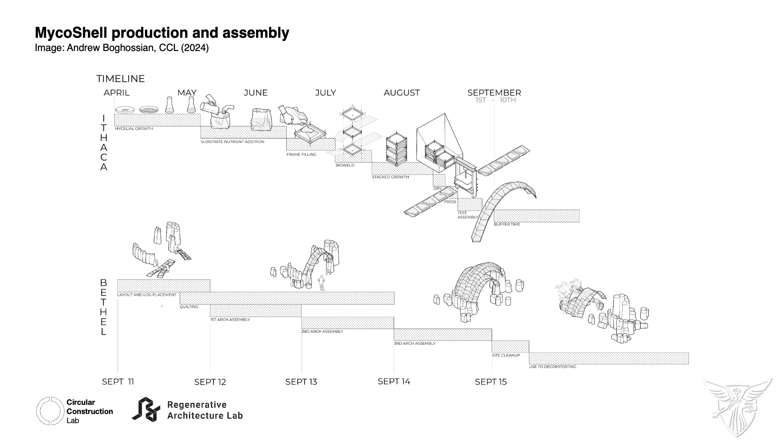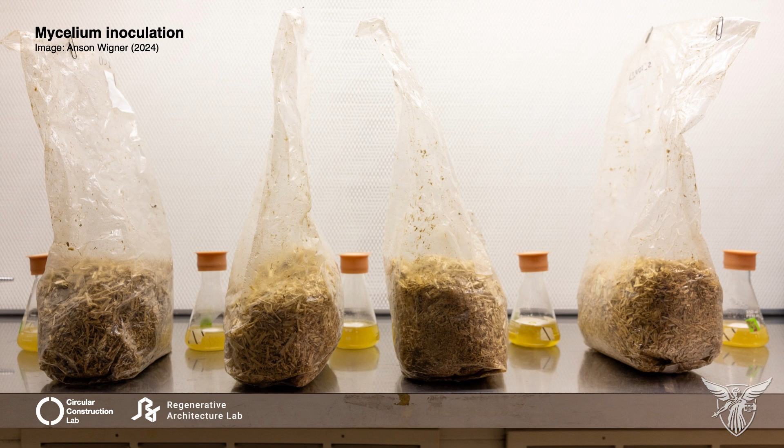And to just lead you through some of this, so this is the moment where the inoculated mycelium gets into the bag with the substrate. The substrate in this case is local hemp and straw from agricultural production right next to Cornell. So all of this is like a 5-mile radius. We actually picked the strain from a tree in front of the biology department on the street, so it couldn't get more local than this.

And then we're growing this under controlled conditions, something like 27 Celsius and 70% humidity, sort of perfect growth conditions for mushrooms. And then to reduce the environmental impact of this, at some point you need to dehydrate that, but we didn't want to use ovens. And so we built solar ovens to dehydrate the material.

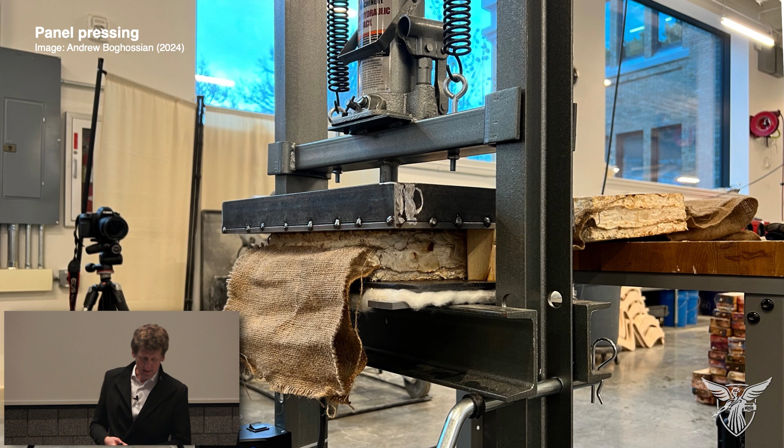And then at some point we had to press it, which is a sort of low-tech constructed hydraulic press that we used for that, to then create these microplies, as we call them, which are reinforced with a layer of burlap, and that burlap is then also used for the connection details. And in the end, it looked like this. This was the fresh and new pavilion right at the opening.